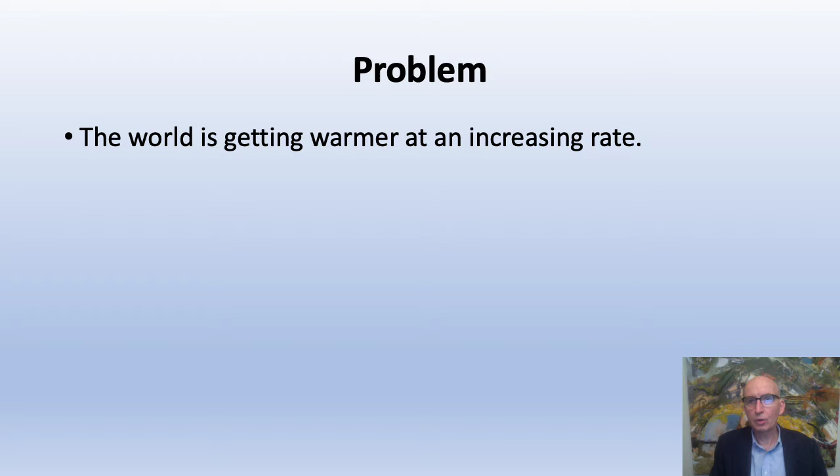The world is getting warmer at an increasing rate. Shown next is a short video segment that illustrates how the warming trend is correlating with rising atmospheric CO2 levels, and that these levels are continuing to rise at an increasing rate.

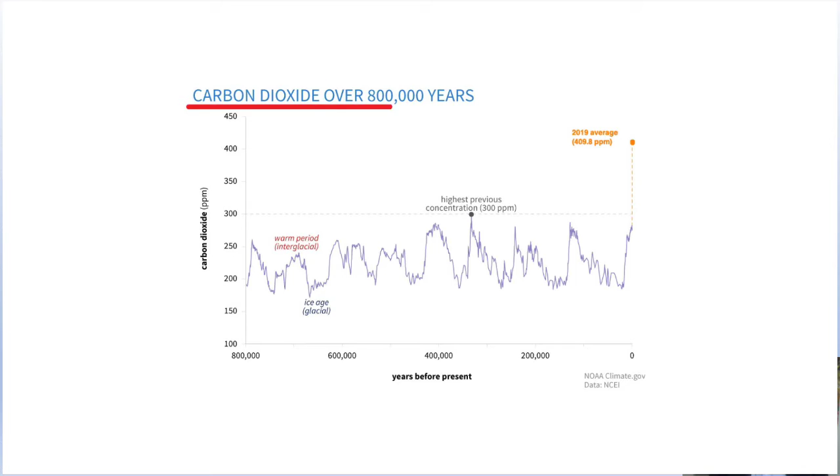The world is getting warmer, and at an increasing rate. A large reason for this is CO2 levels in the atmosphere. Since the beginning of the Industrial Revolution, they have risen at an unprecedented rate. Rising CO2 levels have been correlating closely with rising global temperatures since 1880.

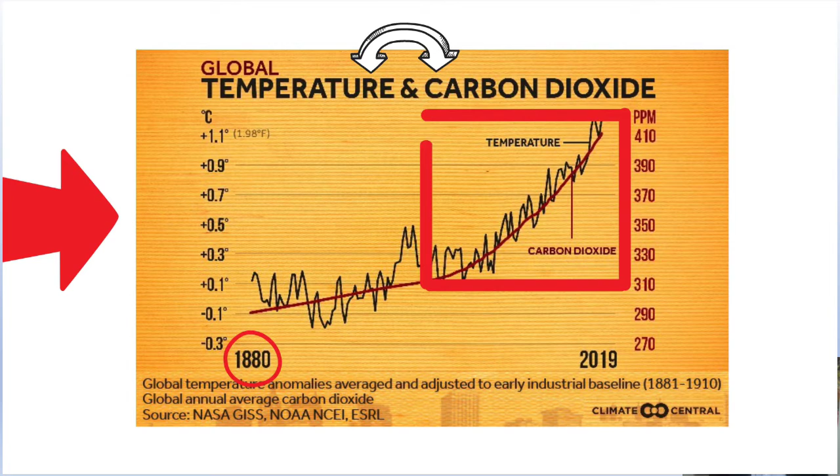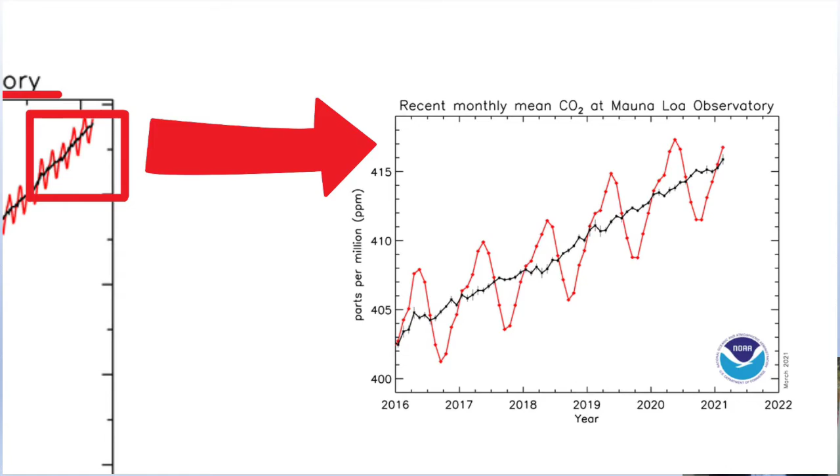This graph shows rising CO2 levels on a shorter timescale as measured at the Mauna Loa Observatory in Hawaii. On an even shorter timescale, you can see average CO2 levels have continued to rise despite a global economic slowdown from the coronavirus pandemic, shown by the black line. The red line on this graph shows the seasonal variations.

Why are these CO2 levels continuing to rise at an increasing rate? There are several factors contributing to this rise, but the main reason is that total overall global energy demand appears to be increasing faster than the renewable energy generation growth rate.

Therefore, carbon emissions need to be mitigated on a much larger scale than what has been occurring. In addition to expanding carbon-free energy generating solutions as fast as possible, the world needs to implement carbon capture from existing fossil fuel energy sources on a very large scale.

Fortunately, there is now a proven breakthrough technology that captures 100% of the CO2 created when generating power from fuels such as natural gas, biogas from landfills, syngas from coal, and diesel fuel. It is called the Allam-Fetvedt cycle, or in less words, the Allam cycle.

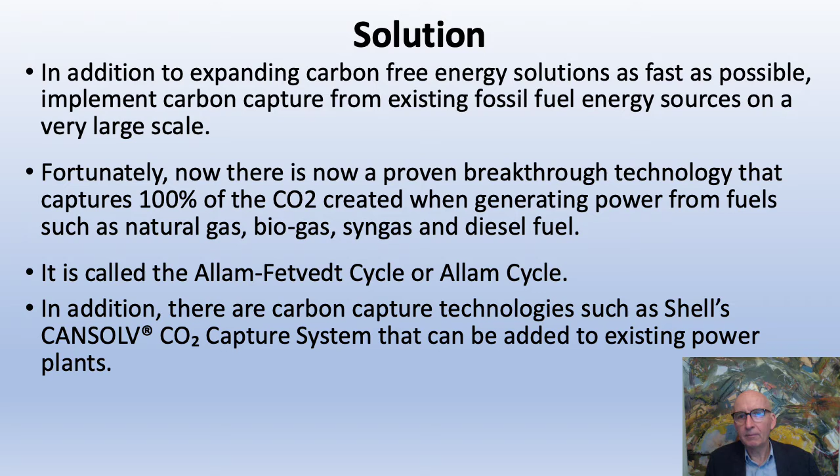In addition, there are additional carbon capture technologies such as Shell's CANSOLV CO2 capture system that can be added to existing power plants. The captured CO2 can be utilized for a wide range of uses, including vertical farming, as well as being sequestered in the ground.

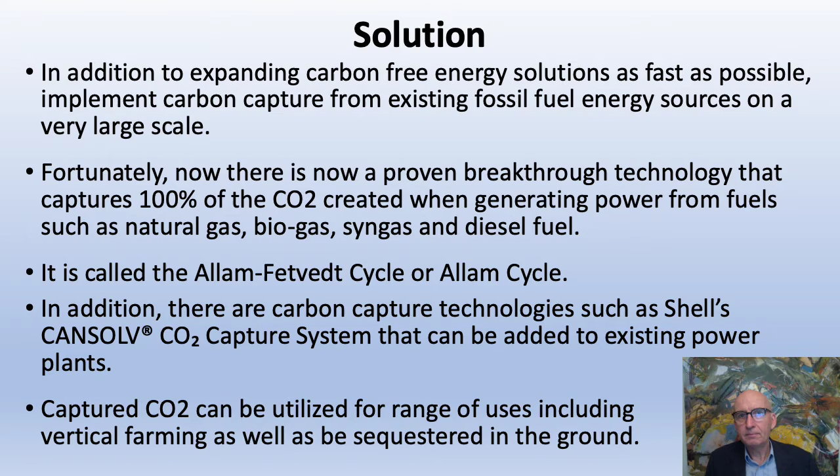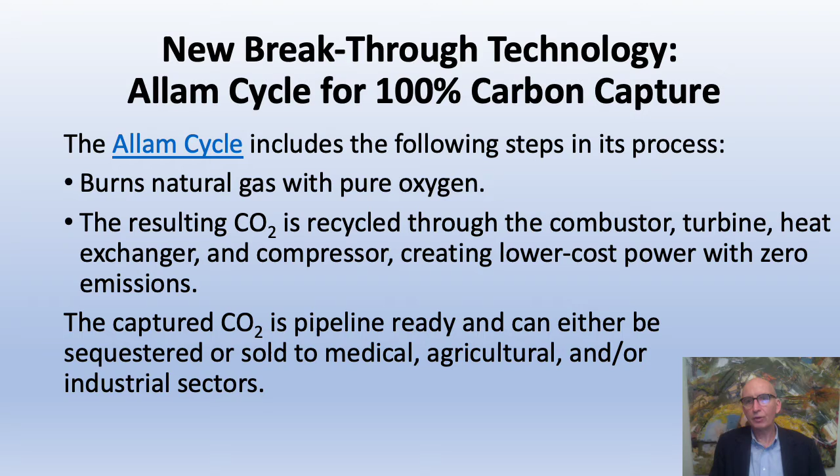The Allam cycle includes the following steps in its process. First, it burns natural gas with pure oxygen. Then the resulting CO2 is recycled through the combustor, turbine, heat exchanger, and compressor, creating relatively low-cost power with zero carbon emissions. The captured CO2 is pipeline ready and can be either sequestered or sold to medical, agricultural, or industrial sectors. The next slide is an animated video segment about a natural gas-fueled power plant that uses this cycle.

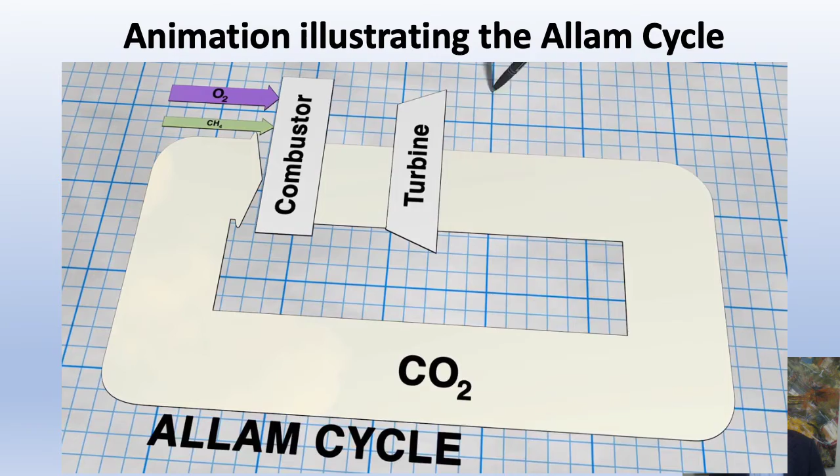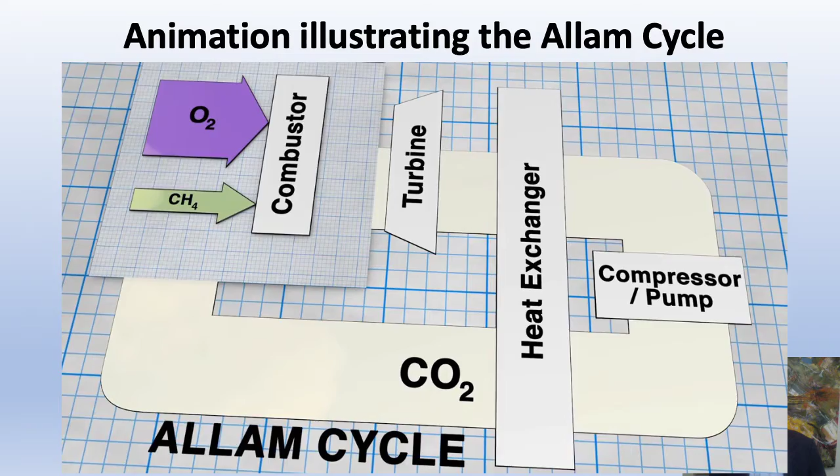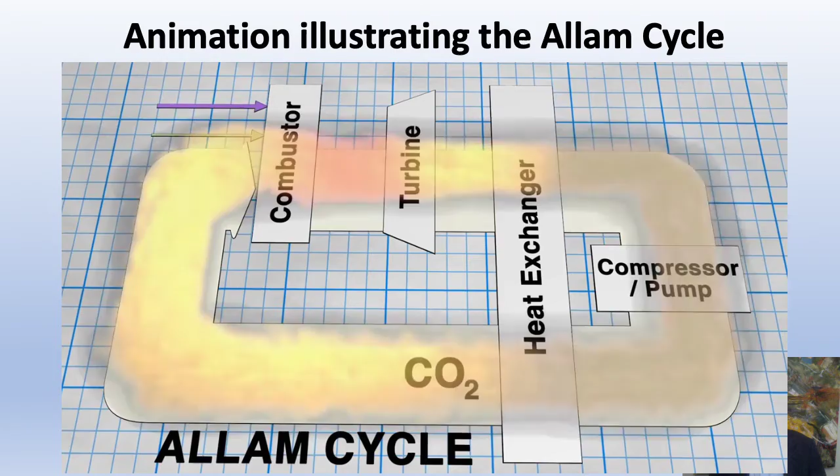Net Power uses supercritical CO2 instead of steam to produce power. Natural gas is combusted with hot, recuperated CO2 and oxygen, preventing NOx production. Burning with oxygen, known as oxycombustion, is typically uneconomic because oxygen is expensive to produce. Net Power overcomes this problem by recuperating the majority of the produced CO2 into the combustor, dramatically lowering oxygen requirements.

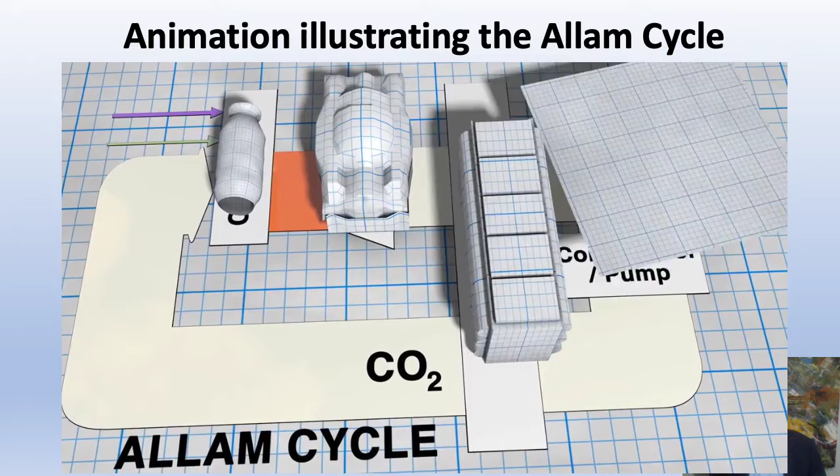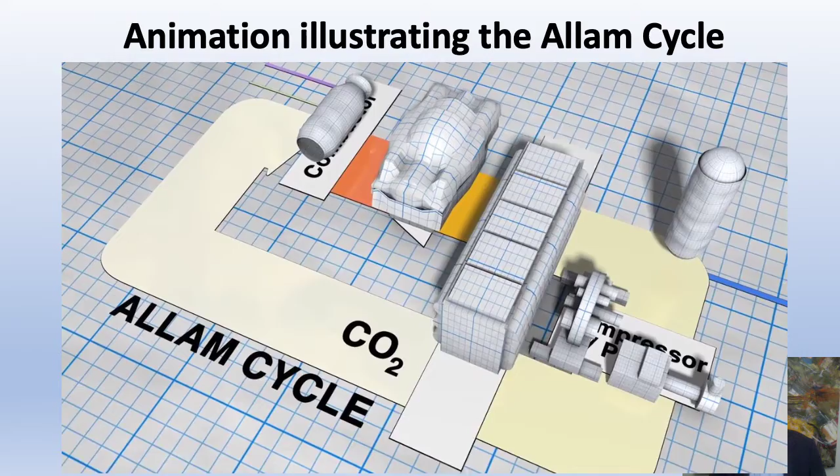The resulting working fluid of high-pressure CO2 and water is expanded through a turbine and then cooled in a heat exchanger. Water is removed, and the remaining nearly pure carbon dioxide stream is compressed and pumped back to high pressure. Excess pipeline-ready CO2 is exported before the working fluid is reheated in the heat exchanger and returned to the combustor. This breakthrough process produces low-cost electricity, eliminates water consumption, and is emissions-free.

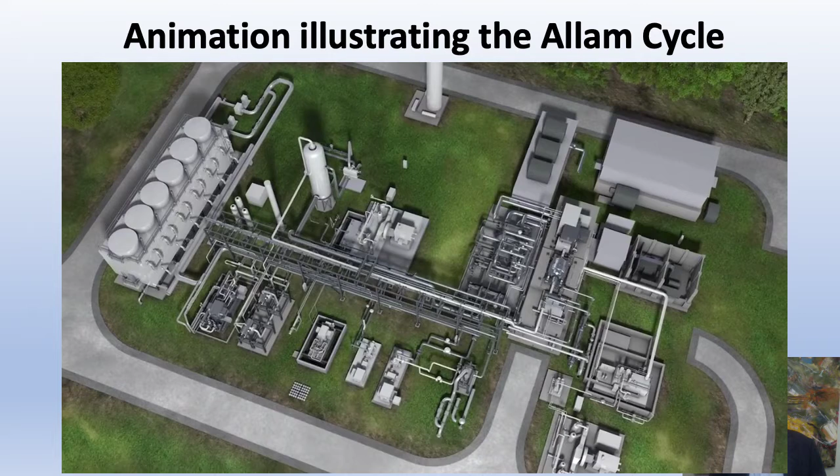The Allam cycle can be implemented on a global scale relatively quickly for several reasons. First, companies around the world can license this technology from Net Power, which is a privately held technology licensing company. The owners of this licensing company have considerable experience, capacity, and credibility in the power generation industry, which include Exelon Corporation, McDermott International Limited, and Occidental Petroleum, or Oxy.

Lastly, equipment manufacturers and contractors around the world that are currently supplying, constructing, and/or operating conventional power plants can also build and operate the Allam cycle power plants. Therefore, capacity exists for rapid large-scale implementation of this cycle starting now.

As I mentioned earlier, there are carbon capture technologies such as Shell's CANSOLV CO2 capture system. This system is now in use in many locations and is declining in cost. It can be added to existing power plants to enable carbon capture on a large scale.

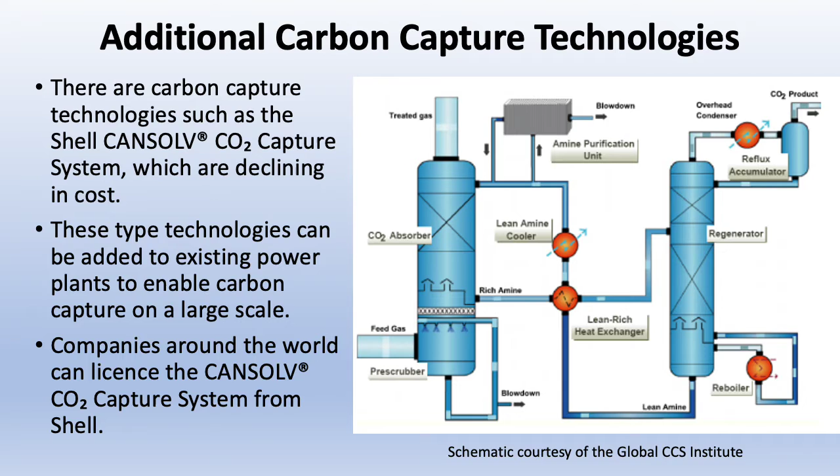In a similar way as the Allam technology can be utilized, companies around the world can license the CANSOLV system from Shell. Initially, CO2 captured from these power plants would be mostly sequestered in the ground. However, once there is a reliable source of low-cost CO2 available, this CO2 can be used for many other uses, including accelerating plant growth in indoor farms, strengthening concrete building materials, and production of carbonated beverages.

There are several sequestration options for CO2 captured from power plants. This includes injecting CO2 into oil and gas fields, into basaltic formations, and into salt caverns.

Carbon dioxide can be captured from power plants using the Allam cycle, and can be complemented by other sources using other carbon capture technologies. For example, carbon dioxide can be captured from existing cement plants and combined with carbon dioxide from power plants in the same pipeline for transfer to long-term storage or for utilization.

Companies with sequestration expertise can engage with major carbon emitters such as power generation utilities and cement manufacturing companies to create and operate commercially viable large-scale sequestration projects. Once a project is viable, smaller sources of captured CO2 can be added to this sequestration project.

Power plants combined with carbon capture can help make an electricity grid that is also powered by renewable energy farms more reliable. For example, if wind power is not available for a few days, these power plants can provide the needed electricity. Since a power plant using the Allam cycle is very efficient and captures 100% of the carbon dioxide created, it can also be used during low demand periods to power direct air capture of carbon dioxide from the atmosphere. If this was done, this power plant would have a significant negative carbon footprint.

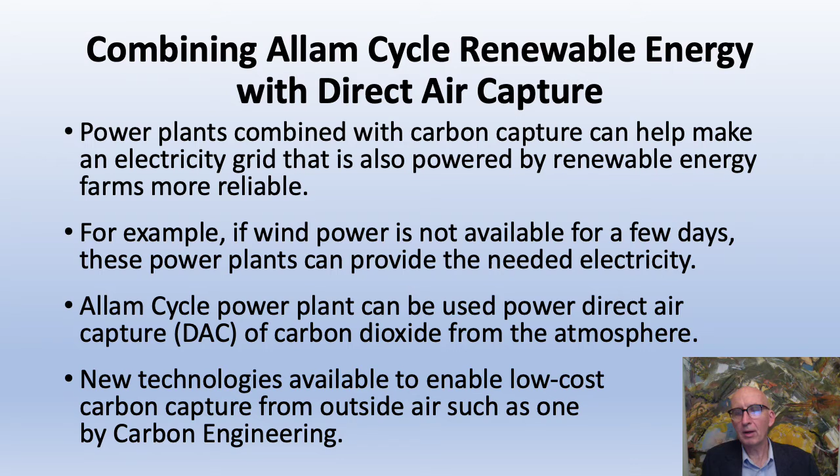Shown here is an example of a combined power system for maximum reliability with negative carbon emissions. The natural gas power plant running the Allam cycle enables 100% carbon capture and delivers power to the power management system. This power management system is also supplied with electricity from wind and solar farms.

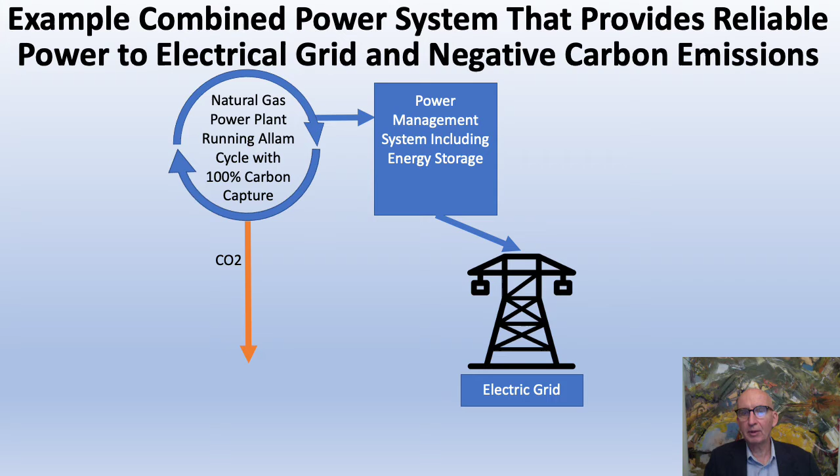To help manage the power more effectively, this power management system includes energy storage to manage short-term power peaks and shortfalls. If a substantial amount of power is reduced for a long period of time, such as if there is no wind power for a few days, the power management system reduces the power to the direct air capture system of carbon dioxide. In this way, the power management system can maximize the reliability of the power to the electric grid.

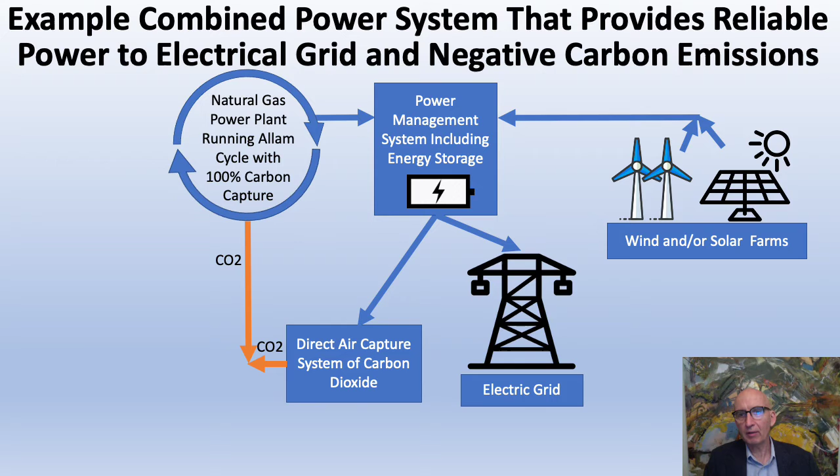The carbon dioxide that is captured from the power plant or direct air capture system can be utilized in beneficial ways, such as accelerating growth of food in a vertical farm, or be sequestered in the ground.

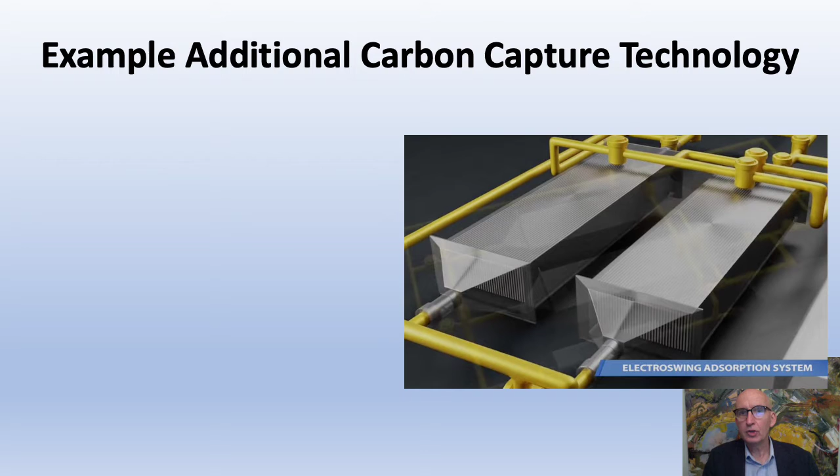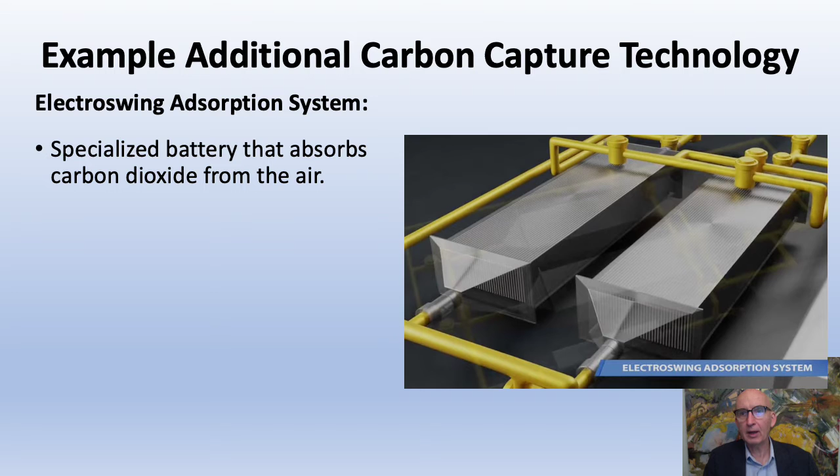There are several other carbon dioxide capture systems available or under development. Shown here is a very promising one called the electro-swing adsorption system that is being developed by MIT. It is essentially a large specialized battery that absorbs carbon dioxide from the air or other gas stream passing over its electrodes as it is being charged up, and then releases the gas as it is being discharged.

In operation, the device would simply alternate between charging and discharging, with feed gas being blown into the system during the charging cycle, and then pure concentrated carbon dioxide released during the discharging cycle.

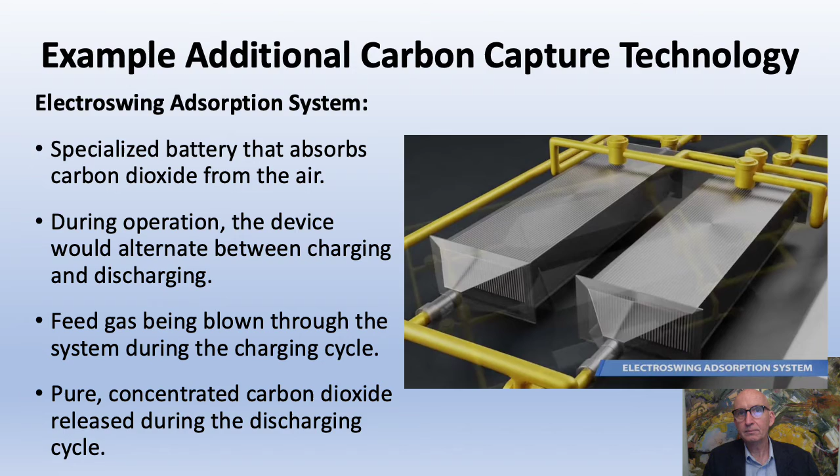If this combined power system was implemented in many locations around the world, the scale of the impact on reducing carbon emissions would be extremely large, likely in the range of billions of tons of CO2 per year.

Typically, green bonds are issued once a project is operational and generating income, so bridge financing is normally needed to construct and commission these combined power systems. This bridge financing normally includes at least two components. The first is the equity component that is provided by the owners of the project and the respective investors. The second component is a bank loan by one or more financing institutions, like the Canada Infrastructure Bank.

When the green bonds are issued to repay the bridge financing, they can be promoted to financial firms that are likely buyers of these bonds, such as the firms that have joined the Glasgow Financial Alliance for Net Zero, which have a combined total of over 70 trillion US dollars under management. Therefore, there are existing financial mechanisms and capital available to finance a large-scale implementation of these combined power systems around the world.

In addition to the Glasgow Financial Alliance for Net Zero, there are other climate finance initiatives that include firms that would likely purchase green bonds to finance these types of combined power systems. For example, there is the Institutional Investors Group on Climate Change, which includes firms that have over $54 trillion in assets under management. Secondly, there is the Climate Action 100+ initiative, which includes firms with over $35 trillion US dollars in assets under management. And finally, the Coalition for the International Platform for Climate Finance, which includes firms with over $7 trillion in US assets under management. Please note that some of the financial firms that are members of one climate finance initiative listed here may also be members of other initiatives that are also listed here.

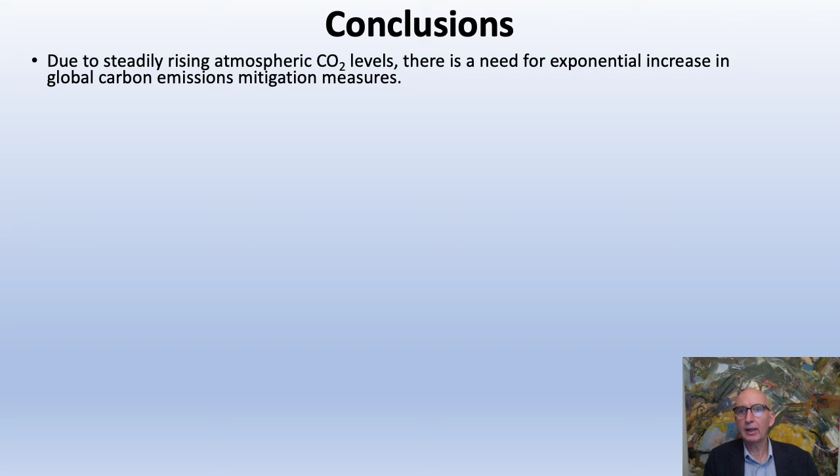In conclusion, due to steadily rising CO2 levels, there is a need for an exponential increase in global carbon emissions mitigation measures. There is now a proven breakthrough technology that captures 100% of the CO2 generated when generating power from fuels such as natural gas, biogas, syngas from coal, and diesel fuel. It is called the Allam cycle.

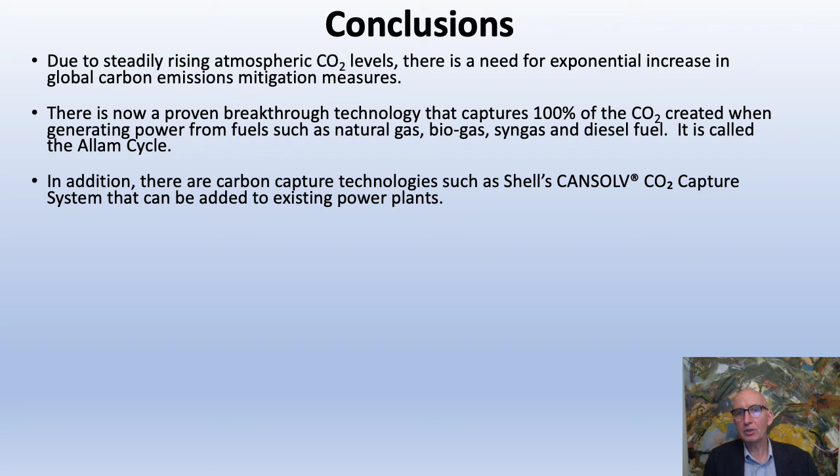In addition, there is carbon capture technology such as Shell's CANSOLV capture system that can be added to existing power plants. The CO2 captured can be utilized for a range of uses, including vertical farming, as well as sequestered in the ground. Power plants with carbon capture can be combined with renewable energy farms to produce more reliable power to the electric grid and generate negative carbon emissions.

This solution can be financed on a global scale with green bonds that are purchased by firms that have joined the Glasgow Financial Alliance for Net Zero, which have a combined total of over $70 trillion under management. This solution helps governments, companies, and workers that depend on income from fossil fuels to profitably transition to a low-carbon economy, which is critical for their support.

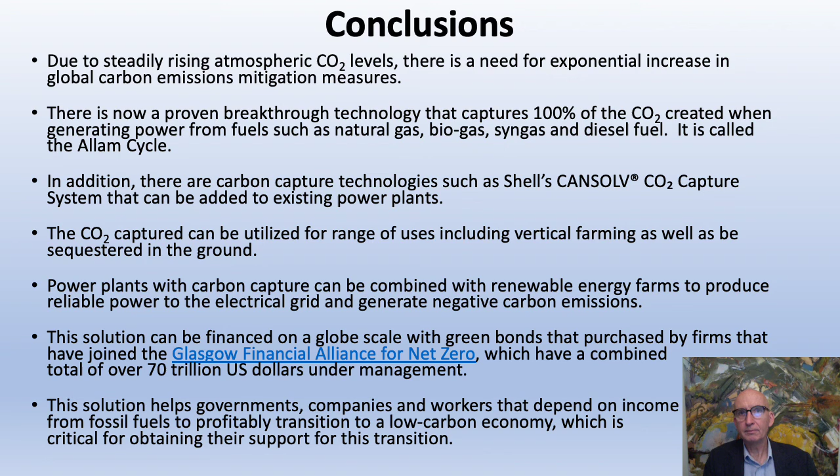To help catalyze the implementation of this opportunity on a global scale, we recommend the following. First, invite independent groups such as Drawdown and the Center for Climate and Energy Solutions to work together to estimate the full potential impact of implementing this opportunity on a global scale.

Since organizations like the IEA have already estimated the potential impact of some carbon capture technologies, this estimate can build on the work that's already completed and take into account the latest technologies and strategies to accelerate carbon capture and storage globally. Second, inform companies in the oil, gas, power plant, solar energy, wind energy, and energy storage sectors about this opportunity, which can help bring them many billions of dollars in funding.

Third, inform financial institutions that facilitate issuance of green bonds of this opportunity, which will likely enable them to generate hundreds of millions of dollars in fees doing this work. Lastly, respond to the recently published concerns about carbon capture, utilization, and storage by about 500 environmental groups to help build broad-based support to implement this opportunity on a global scale.